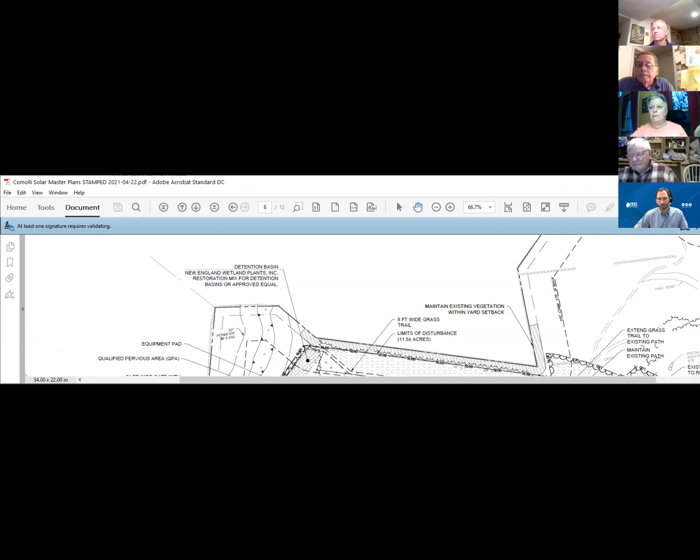Wait, don't touch anything. Just make it bigger so you can see more people. Oh, here's the view—can you share now? I don't want them to see me. Yes, thank you. That's all the people that are in. The host can also mute other participants if you'd like. Okay, there we go, right, you should be able to see the screen now. They can't see me, right? You want me to put you on? No, let me just wait. No, Joe, we can't see you, but we can hear you.

Okay, so I'll zoom in a little. So this is the landscape plan that was submitted. This line, can you see my hand? Okay, so this is the existing tree line, and this is the fence. So all the area that's hatched in here with the plus signs, those are trees that will be cleared, and then the array will go here and that'll be replanted with grass.

And then outside the fence, shade trees will be cut, but not grubbed. The undergrowth remains, and then anything that does happen to get disturbed is replanted with a restoration mix. And then this area all in here, this is already grass.

And so going up the hill, up onto that granite hill to the south, that's going to be cut right on up to at least to the top, right? To get your sunlight in. Right.

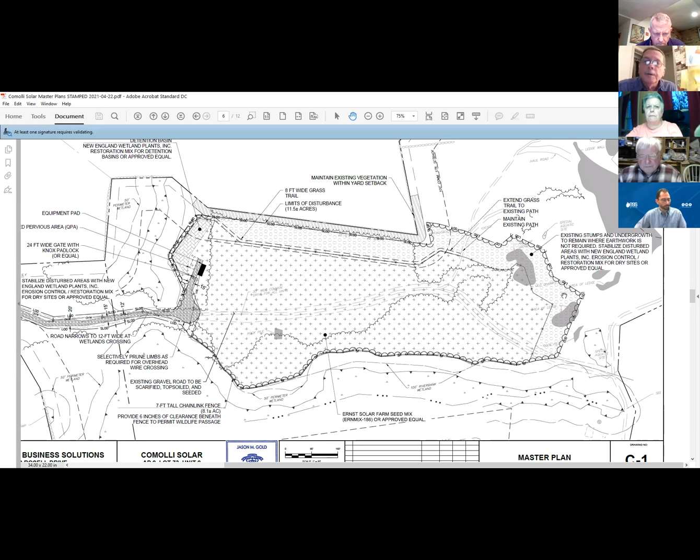Okay, and then up on the north end, where your detention basin is going, and you're right up against the wetlands, you're going to clear right up to the 50-foot perimeter. Is that what you're doing? Yeah, there's a tree line here too. Zoom in on that. And so there is one stretch around here where we're pretty much up against the perimeter wetland.

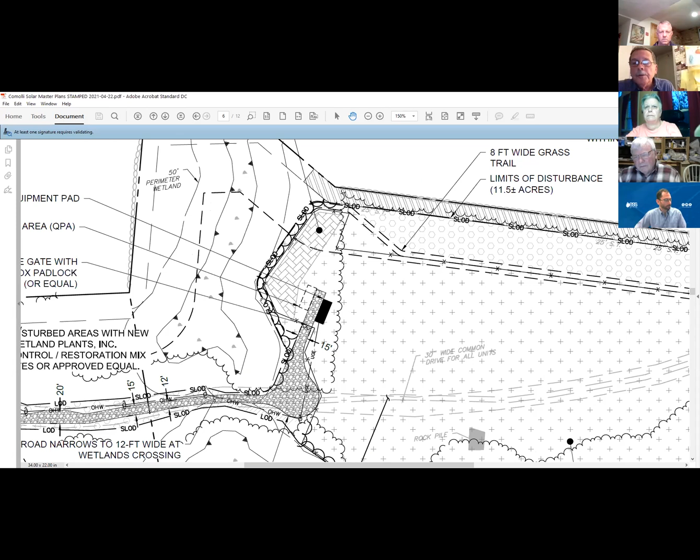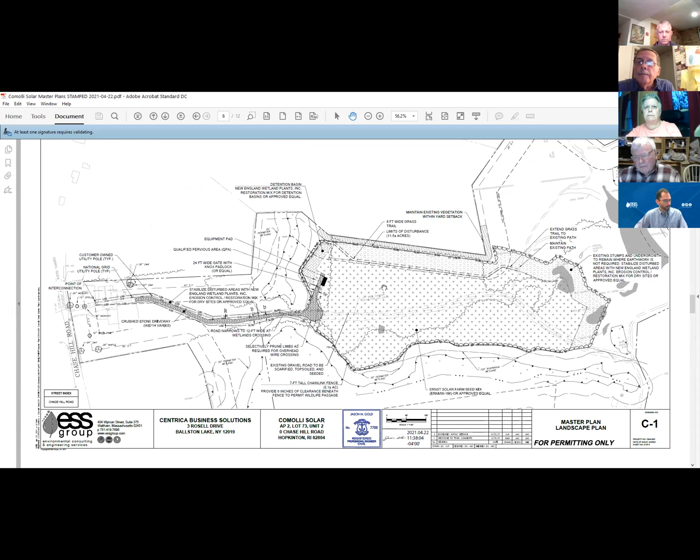And just to understand it, can you show us where the water that goes to that detention basin, how it's going to get over to the wetland? Is there a culvert there? Switch to the drainage plan. So this detention basin here is collecting water from about this part of the site. And then there's going to be, we don't even need a pipe here, there's just going to be a small spillway. And that's just going to flow overland.

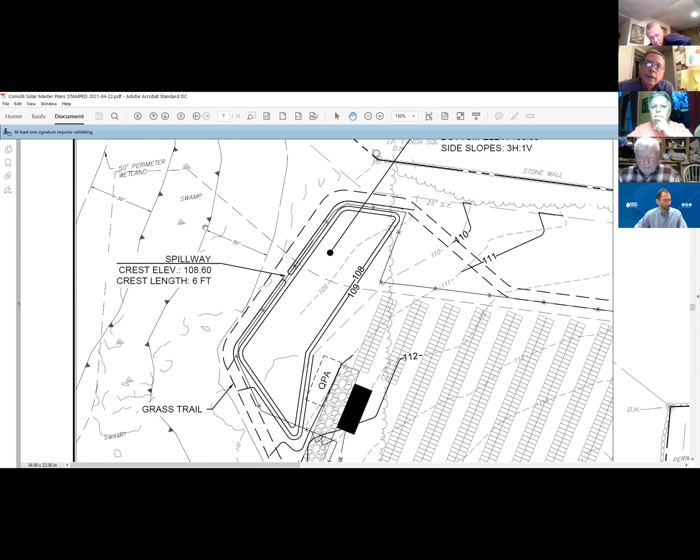Which way is it going to go? It flows this way towards the wetlands. And then is it going to take a right there and go east, or is it gonna go north, or west? It pretty much just goes straight. All right, and then the water from there, which way does it flow now? I don't see the contours. This flows to the east. Oh, to the east. Okay, the wetland flows to the east, yeah.

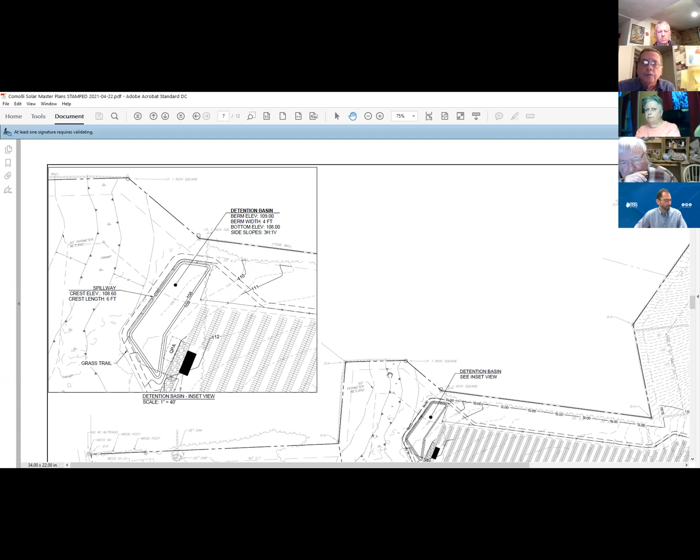Okay, that's what I didn't remember, whether there was actually a culvert somewhere underneath the little road we walked down, and it was going to flow to, I thought it was maybe going to flow to the wetlands to the west. No, they're two separate. Okay. No, this wetland flows separate to the east. Yeah, and then this wetland flows down to the south, and then there's a culvert beneath the road over here.

Then especially down in that south end, what materials are going to be removed? You were saying when we were out there that some of those outcroppings down there now, you're going to have to take down to be able to put the panels up, because I'm sure it's got to do with the steepness or something. That's right. So how much material is going to come off the site down there? Are we talking about 50 truckloads or something? I'm just trying to get some concept of how much that topography is going to change right down there.

Yeah, that's something that hasn't been totally ironed out yet. But yeah, this hill needs to be really flattened out a lot to accommodate the panels. So that'll be this part. I think this part of the hill, if you remember from our site walk, is essentially going to look like the parts north of it that have already been worked. You remember the area before we got to the hill to the north of it where it was flattened out and kind of cleared up. So that's kind of going to have to extend. There were some rock blocks sitting there as well. Yep, yeah, exactly. Right.

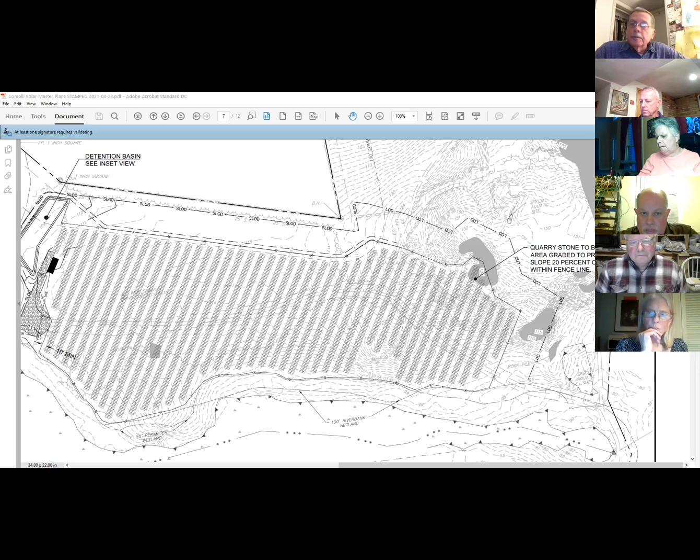Which condition are you referring to? I didn't write down the condition number. Oh, I'm sorry, I didn't think to do that. But it just said that one of the conditions for the native species around the photovoltaic energy system is to be sustained. I didn't really know what that discussion led to in the past with the town council. What's the expectation there? I'm assuming to sustain the native species, you first have to identify what's there so that you can sustain it. Would that make sense?

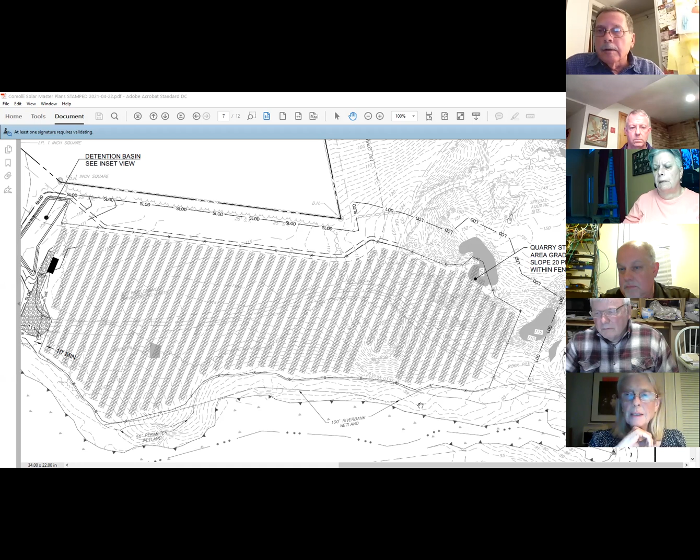I'm not seeing that specific condition quickly, but the area outside the fence, the existing ground cover remains. So the shade trees are cut, but whatever vegetation is there now, that remains. I don't know what they were thinking, what's being preserved - animals or plants, probably both - but it was a requirement, and I didn't understand what was intended. I was trying to get Barbara Capalbo, who was on that town council, but maybe Barbara knows what she intended.

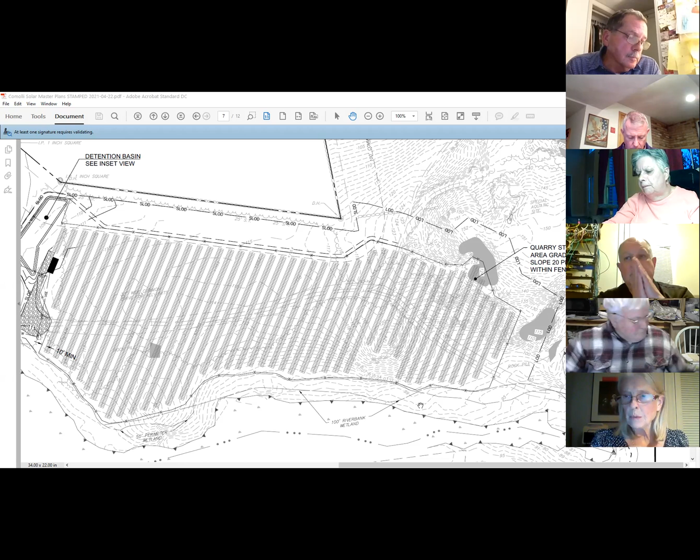I don't remember that particular requirement. I know we talked about using native species, and about protecting native animals, but I don't think it's part of the requirements. I would assume they'd do that anyway, but that would be something DEM and the reforestation or outside ground planting would handle. We talked about doing meadows or native plants, but I don't think that was a requirement. I don't remember that as such. I could be wrong, but I don't remember that. Yeah, I'm not seeing it.

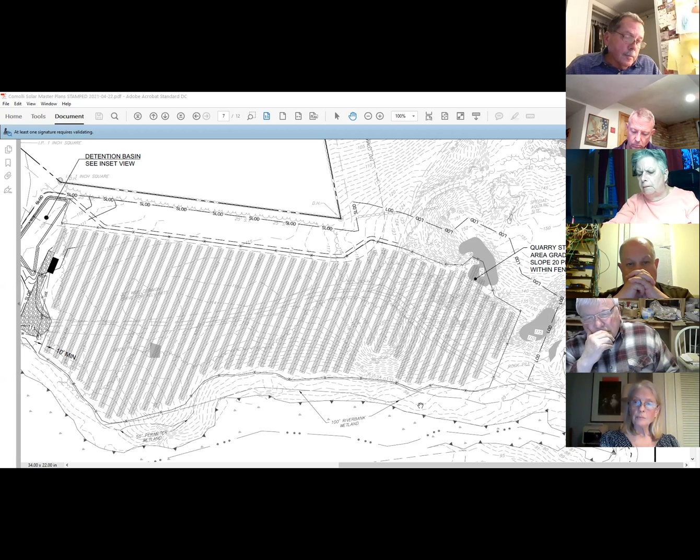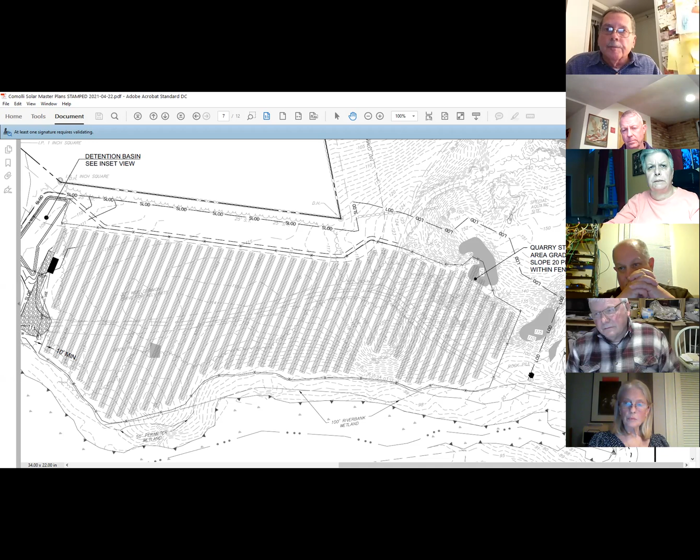Okay, so my last question on that category was trying to understand the ground cover and permeability within the fence area. A lot of the solar sites we've had, we've been after applicants to scarify because of compaction. Maybe this is a different kind of soil here, more gravelly, so maybe that's not as much of a problem. You said you'd probably think the standard is going to be 6 inches of topsoil brought in and put on the site in the panel area. Is that correct, Jason?

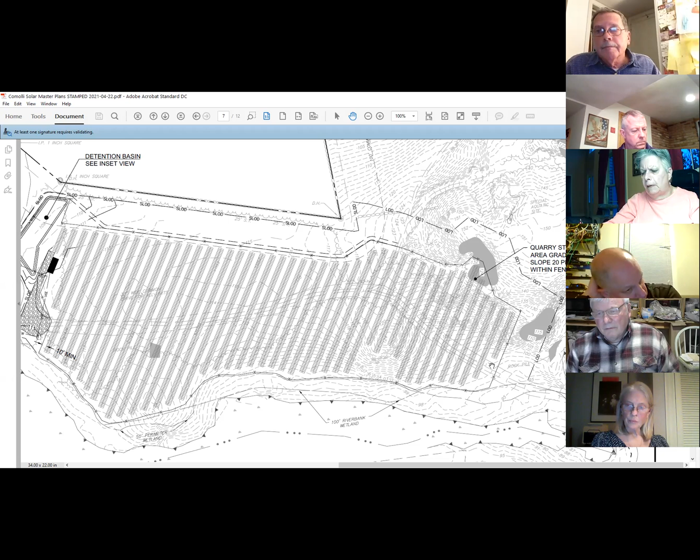Not necessarily that 6 inches needs to be brought in, but there needs to be 6 inches total. So if there's only 3 or 4, they'll need to bring in the rest. The minimum is 4, but lately on these projects, and on the RIDEM comments we recently received, they've been asking for 6 inches on these solar projects. Now you were talking about 6 inches of what we call organic matter - is that what we're talking about? Topsoil, yeah, loam or topsoil.

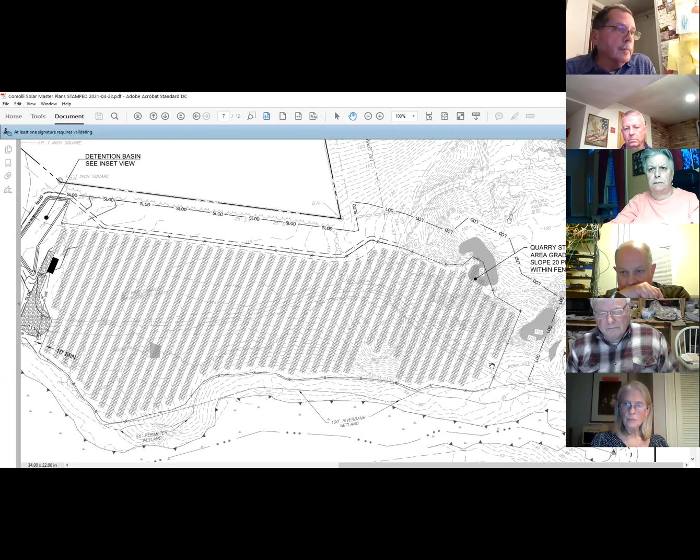So how does that get analyzed? How does somebody go out there and say there's only 3 inches now? Who makes that determination - is that your job? That's on the contractor. I'm sorry, the contractor - is that Centrica we're talking about, or whoever is actually building the project? Right, whoever's building it. Ultimately it's the applicant's responsibility, but the contractor who's building it would be documenting that.

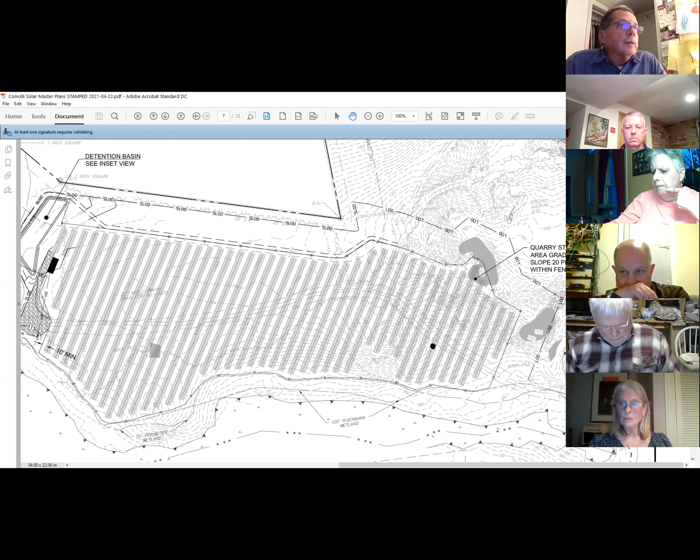So that might be one of our questions for the planning board - how do they determine that they've got 6 inches or 4? I'm not trying to put numbers in your mouth that aren't requirements, but you're indicating it's likely DEM is going to say they want 6 inches. So how would that get determined? Because to me that's a huge factor in how much moisture it can absorb.

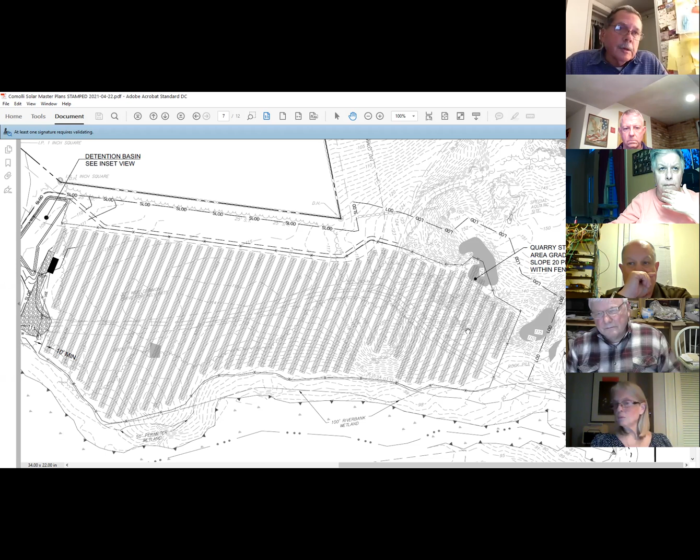If you've got 6 inches of non-compacted topsoil with grass growing on it, I'd think you could absorb - I don't know, it's not my area - but you might get a 1 inch gentle rain and not a bit of it runs off the site. So to me that's important, having sufficient topsoil and having everything nice and light and fluffy so it can absorb that water. So Deb, why don't we try to put that into some kind of note I'll get off to the planning board. Thanks.

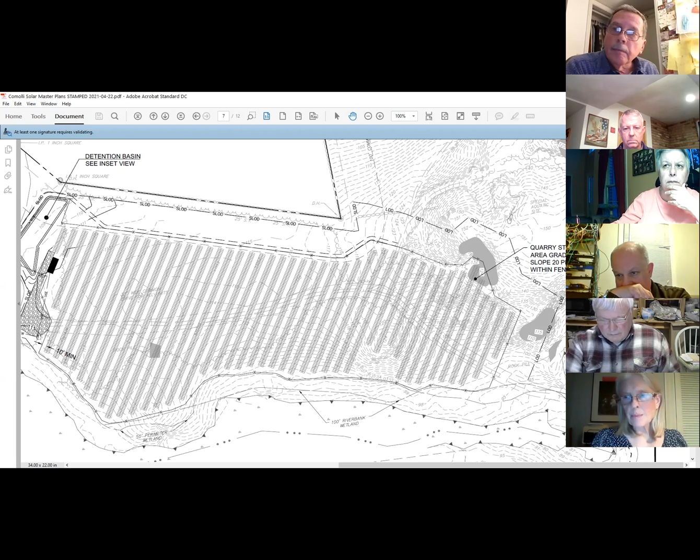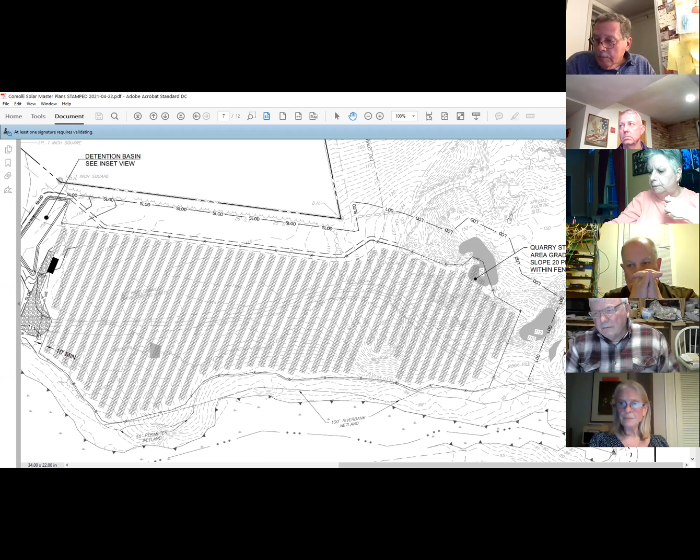I would also think the topsoil would be overplanted with grass or meadow, so that would help with water retention too. Certainly, yes, at least 6 inches for that to take. So I'm assuming that would be something, Jason, that would be part of Centrica's plan? Yes, and the planting is on the master plan set that's already been submitted.

All right, anybody else got any questions on any of the vegetation, trees, grass, or anything? Soil?

Joelle was going to get back to the land trust on that, and this is kind of out of my area in the Conservation Commission, but I just want to know, is that progressing? I have no idea if they're planning on having anything to present to the planning board next Wednesday, or whether this is something they're seeing more long range.

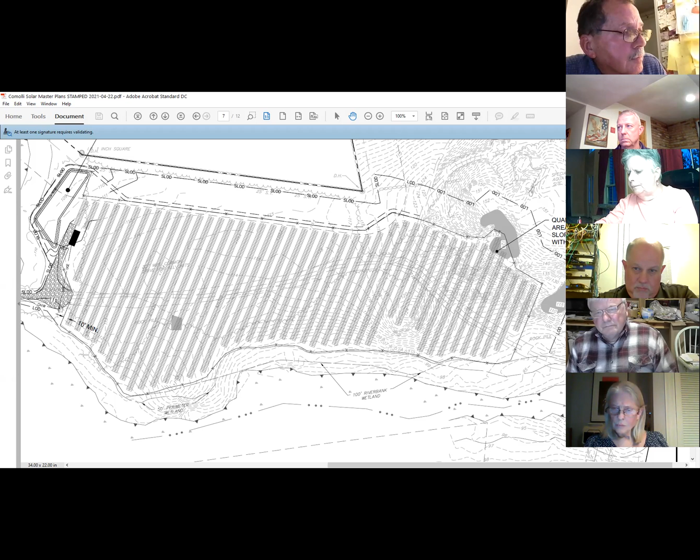Does either of you have any comments on that? I know that Joelle Rocha has been going back and forth with the land trust. I haven't been part of that conversation, but they are actively engaged. Frankly, I didn't hear all of that, but if the answer is that it's being worked on, it's not done yet, that's fine, I just want to know the status. So it's being worked on, yeah. Okay, all right.

Anybody just jump in, I don't want to be the only one talking, but I do have a list, so I'm working down it. Jump in anytime. All right, so roads and trails.

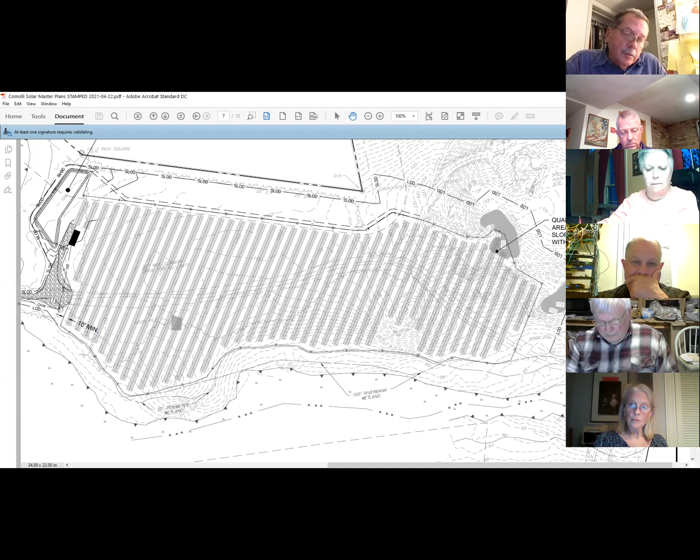My question was, what permitting is needed to widen the road, to come down into that area? It's going to go from what they're saying is 8 feet wide now, to what, 15 feet or 20 feet? I saw on another project where apparently the fire chief or fire marshal was requiring a 20-foot road around the perimeter of the solar field. I guess that's for maneuvering purposes.

What size road is this going to be then again? It's going to vary, so it'll be 15 feet down the hill, and then we're going to narrow to 12 feet between the wetlands to reduce the wetland impact. Okay, so there's not any culvert or anything there that's already filled? Right. Okay.

So the other one, I'm trying to understand it still. When the condo units were created, there was units 1, 2, and 3, and they shared a common interior road system, which is certainly being disrupted with this project. When we had the site walk, at least according to my notes, it seemed to come out that it's understood that unit 3 is not developable. I'm not sure if that's really true or was what was intended, but can either one of you comment on that, or tell me who should comment, as to whether there needs to be any kind of provision for a roadway now or in the future from coming through unit 1 to get all the way back to unit 3?

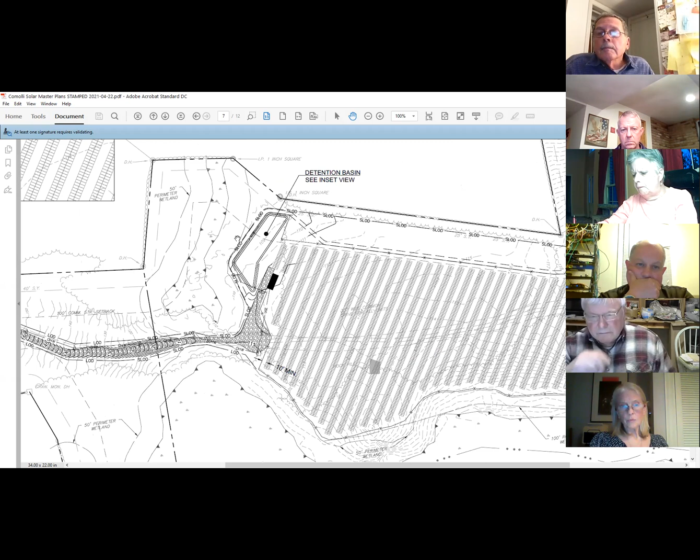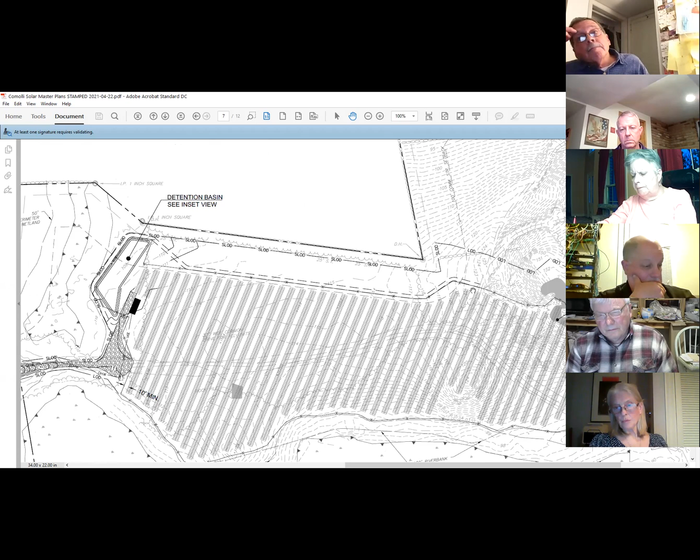Yeah, so I don't think the comment was that it's not developable, just that there's no intention to develop it. The access to unit 3 will be this, you can see the dashed lines here. This is just a grass trail, and that's all that the owner of unit 3 needs to get back there, he just takes an ATV or whatever. So there's the grass trail that routes around the array, I'll zoom out, routes around the array, and then connects back to the existing trails, and you can follow that to get back to unit 3.

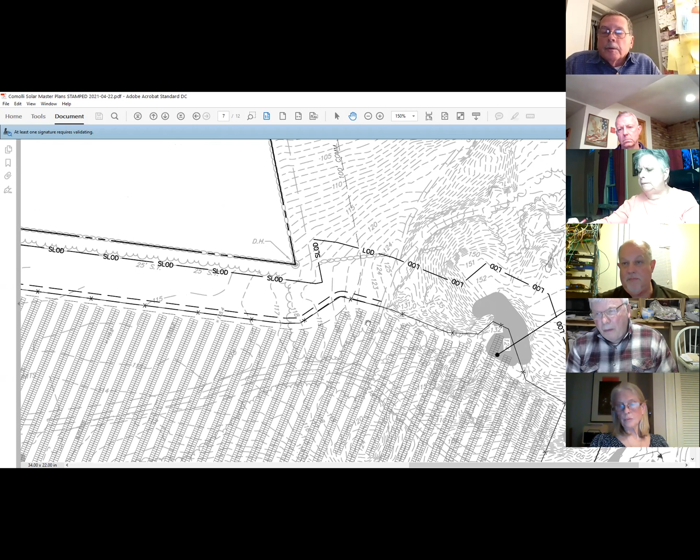So is it a permanent agreement? Is that something that's going to be in writing in deeds, or some kind of understanding between those parties? The reason I'm asking is about the land trust itself, one of their concerns was to be able to come in this way and access the existing land trust properties to the rear. It would be a real help to them, I know. I'm not trying to... I know that stuff is getting negotiated, outside of your control possibly.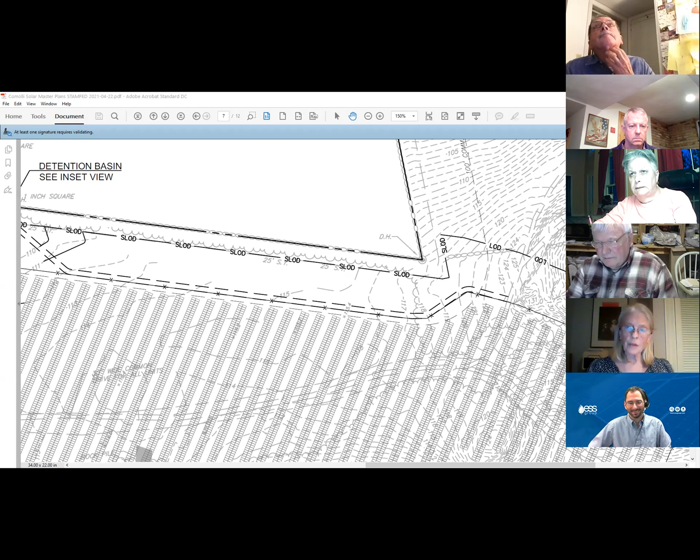It seems reasonable to assume they'll be as efficient as they can, because that benefits the contractor and benefits Centrica. So I'm assuming it's going to be as efficient as you can provide in conjunction with National Grid, and they'll have something to do with it. Not as concerned about that.

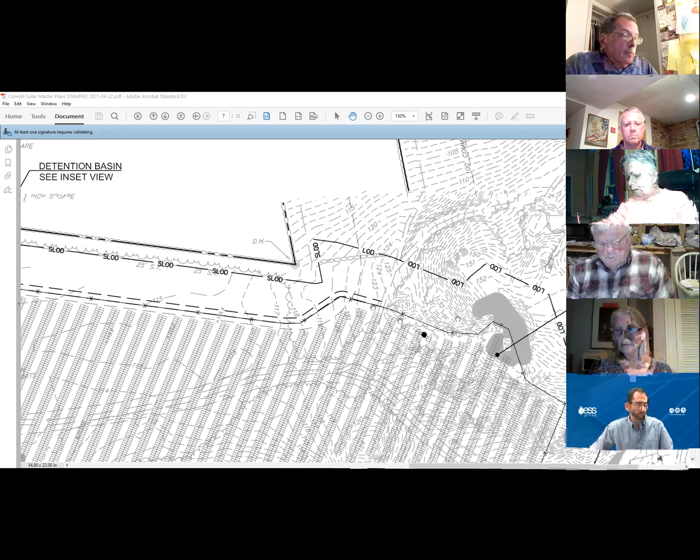The tracking panels, I think, are interesting, however they're also more maintenance unfriendly, so I think they'll probably do a balance on that. But it does seem to me, Jason, that your company is trying to be as efficient as possible as far as the solar energy extracted.

Well, certainly, nobody's going to leave anything on the table unless there's a reason for it. It comes down to an economic balance—the more power a panel can produce, the more expensive that panel is, right? So it's also how much National Grid will accept, in that as well, yeah.

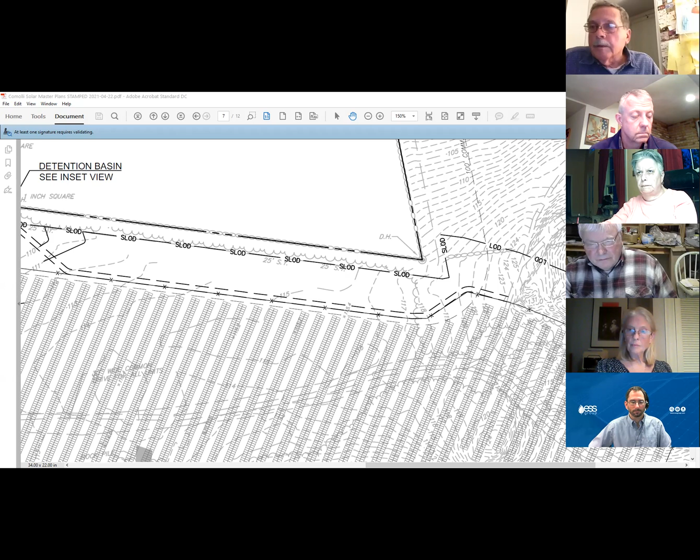By asking questions of various solar applicants, I've been able to create a better understanding of what the industry is and how it works. That's part of why I asked about tracking panels. Something like 90% of panels installed in the United States for the last few years - well over 80% since 2019 at least - are all tracking panels, and they're 30% more efficient than the same panel not tracking. From what I got from the federal lab that oversees the research on it, cost-wise they're equivalent to putting in more panels by using less of a footprint. And this is just nationally, not in the Northeast where everything's more expensive and difficult to build with. The tracking panels are the standard.

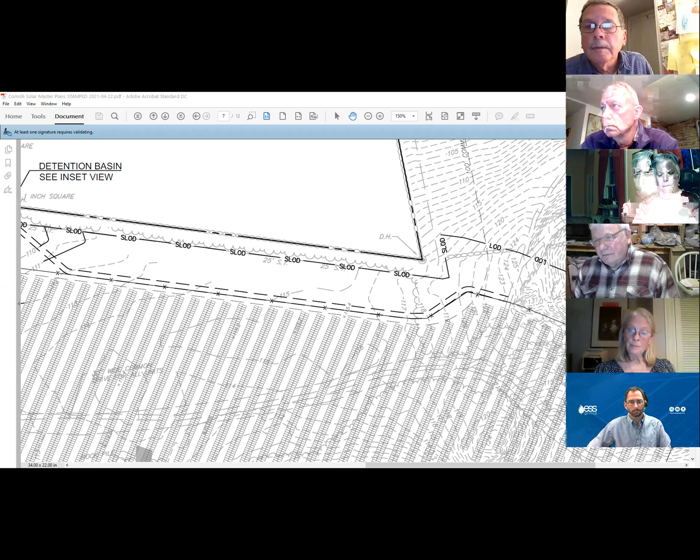Hi, Colleen DiBenedetto from Centrica. Tracking panels at this point are not... Colleen, we can't hear you, can you turn your volume up? How do I turn the volume - I don't see a button for that. If you just put your face close to the microphone, maybe that will help. Can you hear me better now? Yes, okay.

Tracking panels are not at this point in Centrica's business model. We have been installing fixed panels on all our projects. I think we haven't really looked at a cost comparison for that, but can say that the operational expense is very different than fixed panels, and that's why we chose this technology for our projects.

So if I can summarize, if I'm understanding you right, you're saying to get the same amount of electricity it's going to cost more money? Generally speaking, yes. It's the operational and maintenance costs that are much higher for tracking systems.

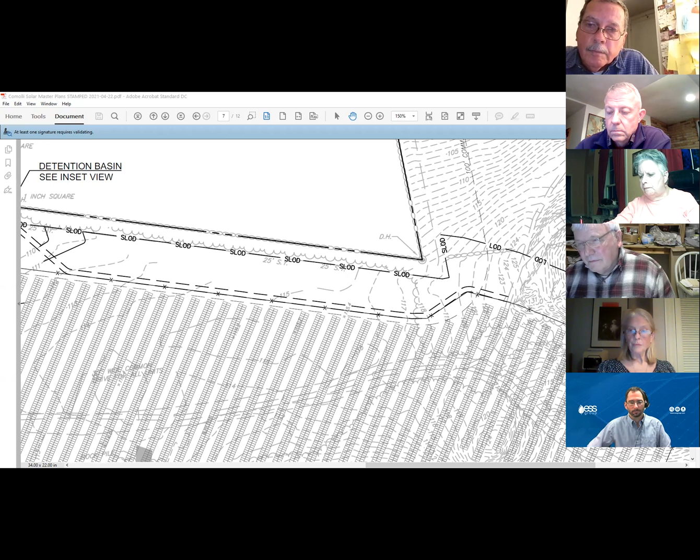So is it just something different here in this part of the country, or does the method used in most of the country just not work here? I work primarily in the Northeast, so I can't comment on the rest of the country. I have seen a small tracking system out at the Laurel Lane Golf Course in Kingston - I think it's less than 500 kW. That's over in South Kingstown? Yeah, it's in Usquepaug. Okay, I'm going to have to go by there and take a look at that.

I keep feeling for this, because getting the highest efficiency is a great way to reduce the footprint or make more electricity, so that's why we're asking. Anybody else got a question on that? No, I was going to make a comment - the engineers putting a solar array on my farm, I asked them about that, and they answered me in one word: maintenance. Okay, basically. Well, I'm sure they have some reason.

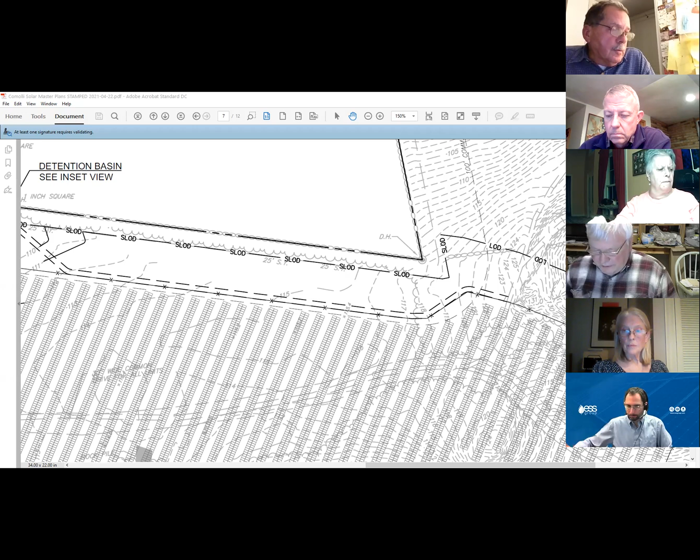The next item on my list was the fence. We talked about getting away from chain link fence and going with something that disappears a whole lot more. I sent information on the kind of farm fence used on other solar projects, and I'd like some feedback. Are you looking into that? This is pretty important to the Conservation Commission - frankly, when I go past other solar projects you can see from the highway, which this isn't one of, it looks terrible. It would be great if you came up with one of these other systems, like a farm-type fence with a black coating that you barely see, as a solution.

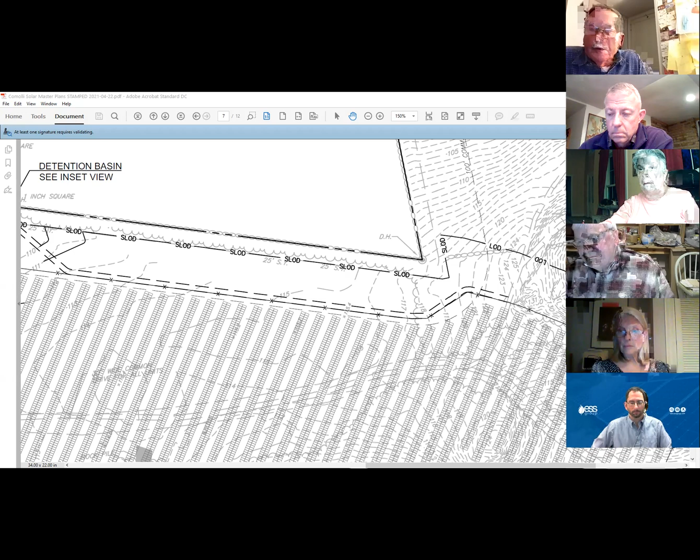So since our conversation, what have you done about that? You make a good point - you can't see this from the street anyway, but we did run that fence by the fire marshal, and he says it's not up to code. What's required, as we mentioned in the field, is a non-climbable fence, and that sample fence you sent is not considered non-climbable.

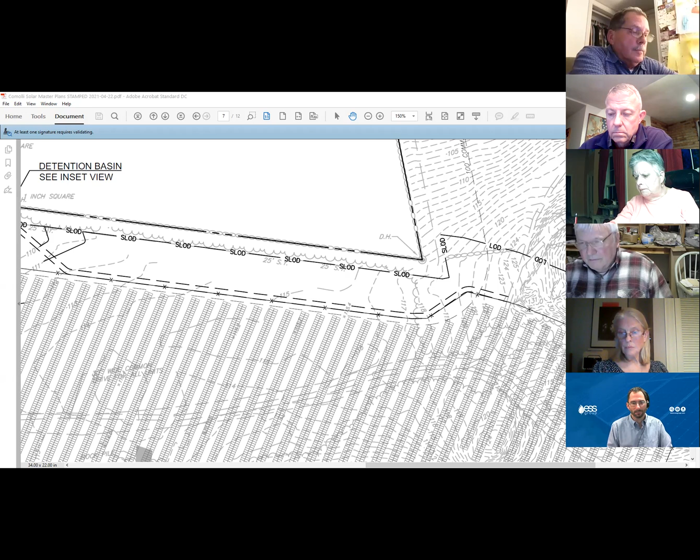Who is the fire marshal? That's Ronnie Sposato. Okay, and is he quoting from the code, or does he just have discretion to make that decision on his own? The fire chief, I'm sorry - there's a code, and there's the fire district's interpretation of it. All right, so it's the fire district's interpretation. Okay, I just wanted to understand. Can you tell me what you have - are we talking about... I can cite it for you if you'd like.

It's Rhode Island Fire Code 11.12.3.3, security barriers. The Ashaway Volunteer Fire Association states that fence must have a design which has been determined to be non-climbable.

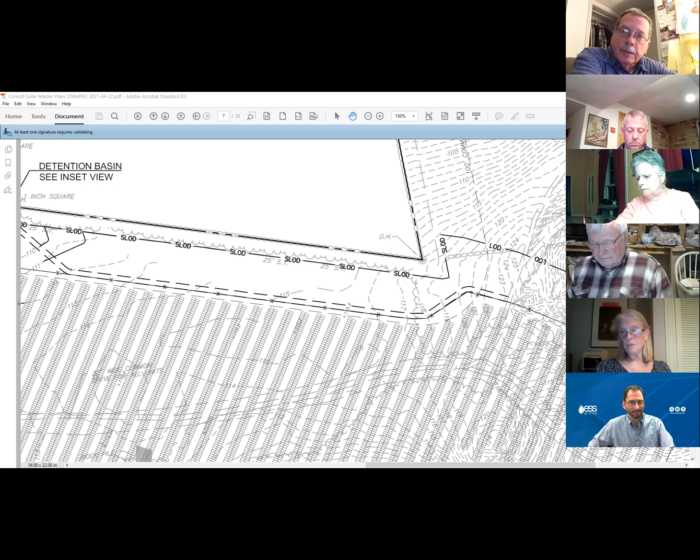Is that a letter from them? It's a memo. Is that something in the packet going to the planning board? No, we just received this yesterday or today. Is that something that could be put in there? I mean, I'm not going to butt my head into a brick wall on it.

I'm just trying to nail that down, because it really makes a difference in appearance. They've got their job to do, and if that's what they think it has to be, then we either deal with that or find a workaround with them. And it's not on you anymore. That's right, and ultimately for the building permit, the fire marshal has to sign off on it. They're going to be more concerned about safety than the appearance of the fence, of course. I understand everybody's got their own approach to it, and that's what their job is.

So is this memo something that you can share? I can't imagine why you couldn't. I think Colleen was working on getting something in writing from Mr. Sposato. I don't know if we have anything yet. Colleen, is there anything coming today that I haven't seen yet? No, nothing's come in yet. Our project manager had a conversation with Fire Chief Ronnie Sposato at the Ashaway Fire Department.

He provided our project manager with the documentation that Jason cited, and said in his opinion, this is secondhand, that he considers the farm fence, the material, the cut sheet and the link that you sent us, Harvey, he considers it to be climbable. I'm sorry, I didn't hear that last part. He considers it to be climbable. Okay, okay, all right.

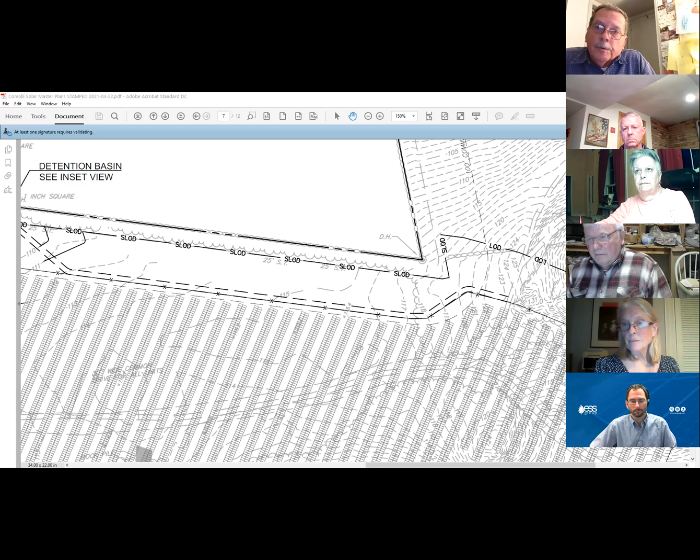So anyway, I would say that if we don't have that, let's put something in ours, Deb, to the letter that I'll put out to the planning board to ask them to please require that and require a review of that. I'm not trying to butt heads with other officials trying to do their job, but I've said all along, we want to see why we can't have something that looks a whole lot better. And so I want to be sure that the planning board...

We're looking for options, Harvey, we're looking for fencing options. Well, anyway, if you could put something together, some scratch notes, and share them with me, then I'll be able to make a copy of what you proposed, of the fencing you proposed. We can put our information in there before the board, and then come back to the fire code 11.12.3.3 security barriers, and that there is supposedly a memo from the fire chief interpreting that to mean it can't be climbable, and that something with 6-inch stays is considered climbable even with barbed wire on top.

So that's where we want to get it to. The fence that you showed was actually very good looking, but there might be interesting fences like that which are not climbable without barbed wire on top, because I think then you're injuring animals that are jumping it. So I would prefer certainly not to see barbed wire. And I think the fence is very nice, and perhaps if it's not, then chain link, but it wouldn't be climbable. I think Ron has a good point, but there might be a fence that is a better look that would still solve both of your problems.

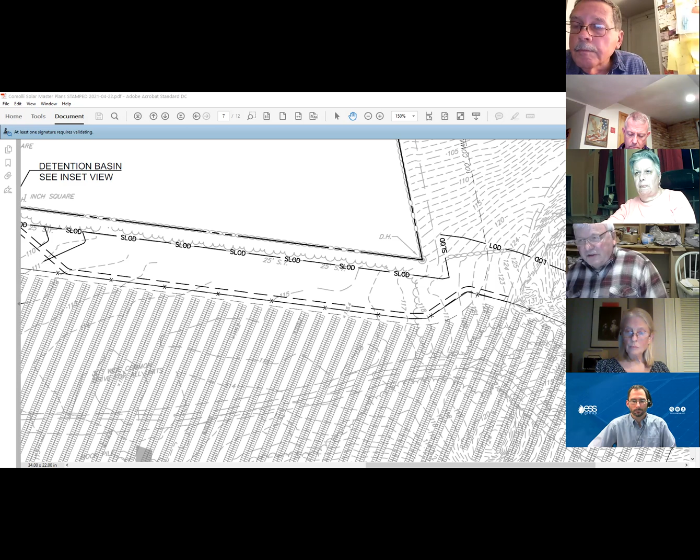You might be able to get a 3-inch stay, the vertical wires 3 inches apart, and it would be capable of not being climbable. That's about the size of the opening in a chain link fence, the little diamonds. So I'd think that's better if it's 3-inch. My concern is that 6-inch space, does that go all the way down to the ground? No, the fence does not go to the ground. The fence is required by the ordinance to start 6 inches off the ground. So if it's still 6-inch, because the animals get their heads stuck in it, if it's 6-inch square, an animal will get its head stuck in that fence.

Right, that's also true. I've had that happen down at the farm, Harvey. But the smaller, the 2-inch, or 3, we get that would be better. It would solve both problems.

Gary's right. Well, anyway, if we can eventually get copies of all that stuff, I think if we got all the material to work with, we know what the fire chief says, we know what the electrical code says, we know what the fire code says, then we might be able to better look for these alternatives.

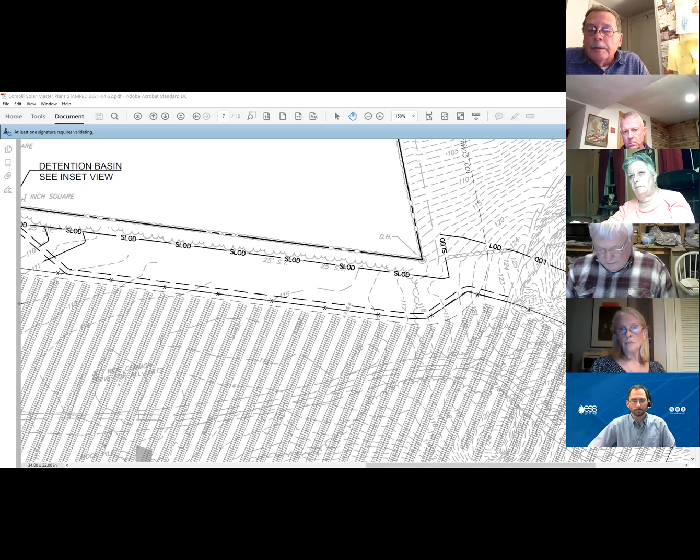It makes a huge difference on where it is visible, and this area is going to have public use right up around it early on, because the land trust is going to have management of that land around it.

So that's all, I'm just trying to move things in the right direction. I'm also looking at this on other projects, so I'm trying to move it along. I appreciate you getting down into the details there, and thank you, Barbara and Gary, for your comments as well.

We're getting close, I think, on decommissioning. The only question I could come up with, I'd love to hear some others, is there any part of the solar project components that you will not remove upon decommissioning?

No. That was a no? That's a no, yes. Okay, that's all you need to say. Anybody else have any questions on decommissioning? I would assume that National Grid's telephone poles stay.

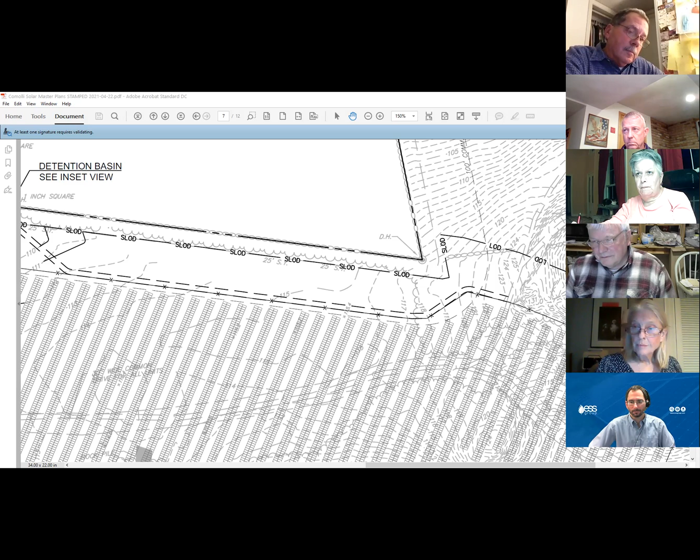That's a good question. Does anybody know the answer to that? Currently, in our decommissioning estimates, we do not include removal of the utility poles. The equipment on the poles we include, however the utility poles we have not included in our estimates.

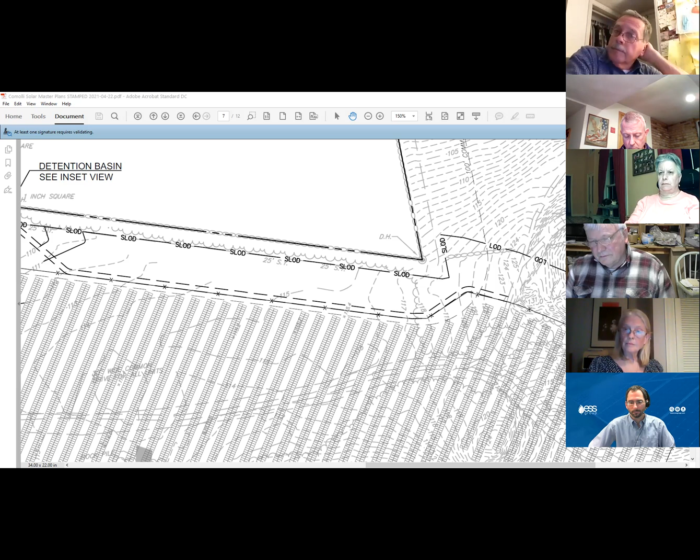Now, most of those poles are on unit 1, right? Yes, all of the poles are on unit 1. I thought there was going to be a couple of them on unit 2. No, you're right, I'm sorry, I misspoke. All of National Grid's poles are on unit 1, but there are a couple of the solar-owned poles on unit 2.

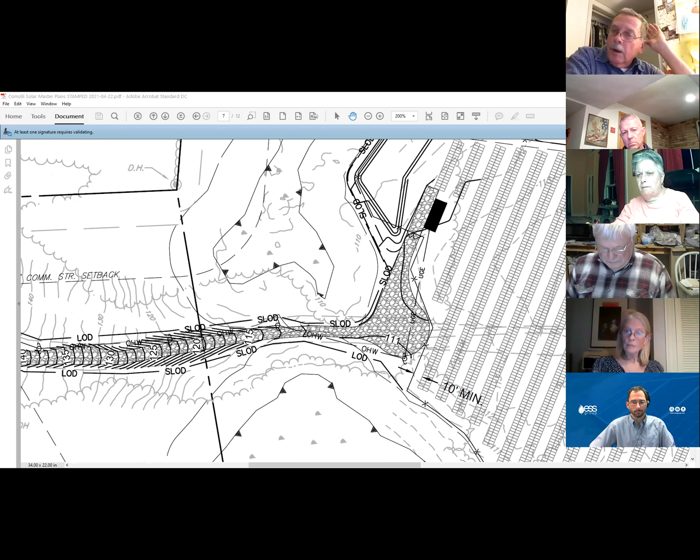So the wires will be removed off those and the poles will still be there? I mean, the wire's pretty valuable. That's got to be pretty heavy duty wire, I would think. Right, I would think so.

I think Colleen's stuck on mute.

Would it be a big deal for those to get removed, the wire and the poles that are on unit 2, before it goes to the land trust? We can include that in our decommissioning estimate, yes. Okay, thank you.

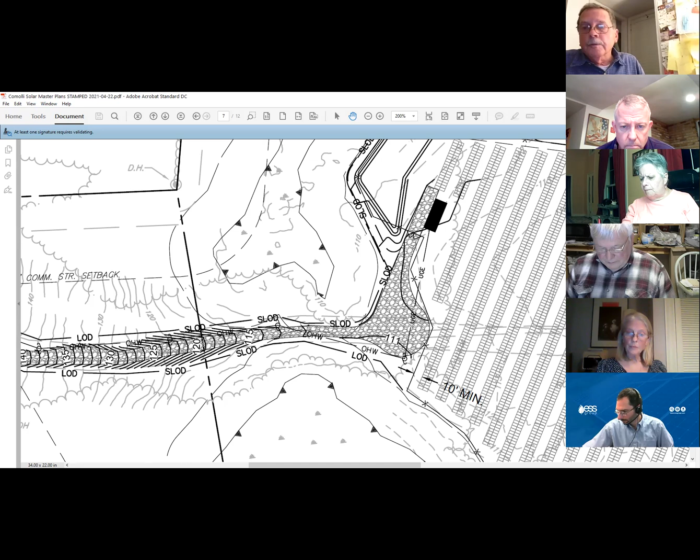Okay, and the last one I had was reforestation. I know we had some discussions with Joel as well, that the land trust in the field, right, what is the field right now, at least? They're very interested in having something like a wildflower meadow, not a forest. It hasn't been forested in probably 75 years or something, maybe a lot longer than that, and they're not trying to bring that back into a forest.

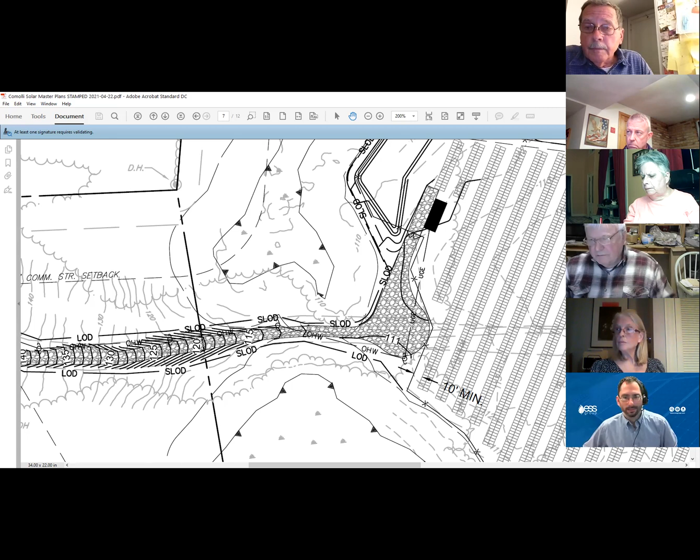Is there a forester that's going to be involved in this project? That's kind of a preliminary plan, too early to get into that level of detail. I think Joel's been talking to the land trust about that to some point, but I have not been involved in that conversation. So where I was trying to understand was if there is a forester already going to be working on this project in some manner, because the planning board's going to want to see some amount of detail about reforestation.

Possibly there could be conversation between the forester and the land trust, for the forester, basically as a professional, to give them some advice as to whether any of this area really makes sense coming under their ownership, for them to have forest planted or to have the grassy open space that I think they would prefer in the majority of that area. So they might need a little bit of guidance, but they're going to be the eventual owners, so it's important that it fits well with their mission to manage that space.

So the answer right now is that you don't know if there'll be a forester brought in for the project at all. At this point, I don't know either way.

All right, so yeah, we just might want to raise that as an issue, that if there is a requirement for a forester to somehow be involved, get the land trust heavily involved, because they're going to be the eventual owner and manager of it, and it needs to end up not putting in a bunch of trees that they're going to have to take right back out or something. I'm sure, yeah, it makes sense.

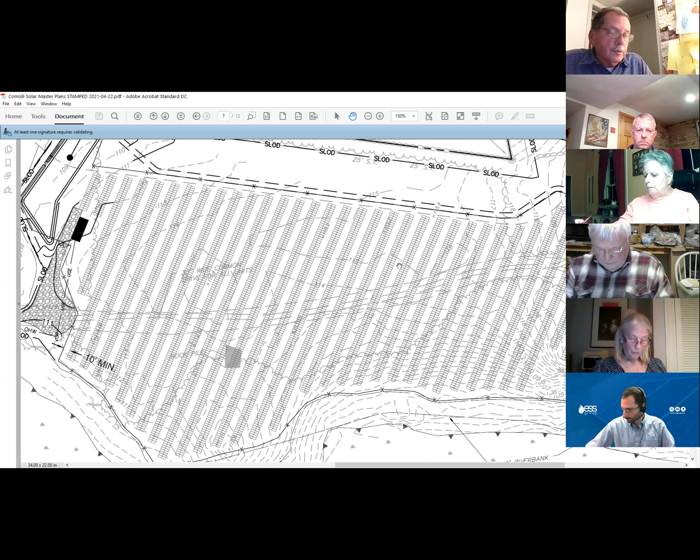All right. Jason and Colleen, do you have any questions for us? I'm taking that as a no. Colleen: I have no questions, Harvey, but thank you very much for allowing us to participate tonight.

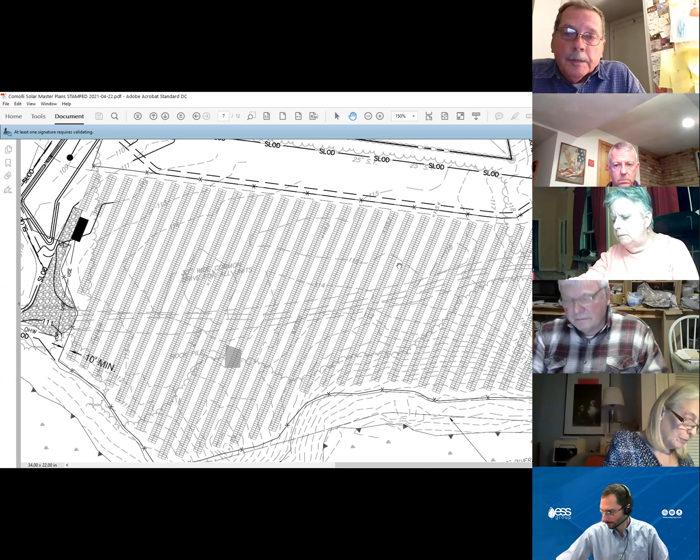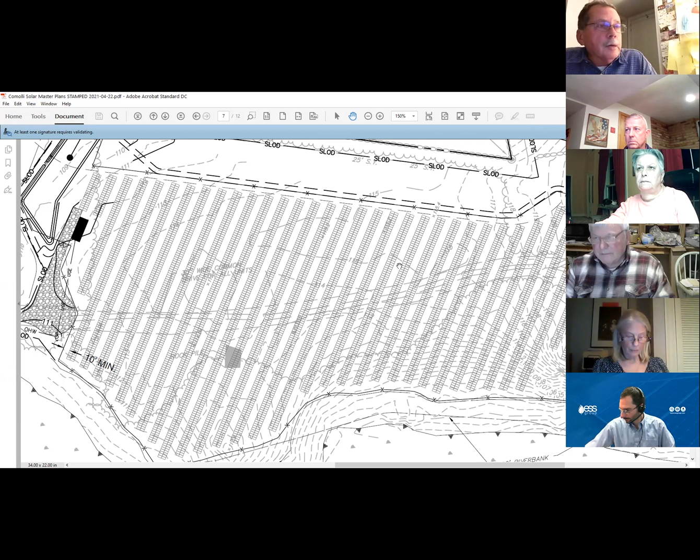You're most welcome. So what we're going to try to do, what we have to do as a Conservation Commission - the planning board has their strict schedules, they have all kinds of legal requirements to get the projects reviewed in a certain time period and so forth. So the Conservation Commission just has to be the one that jumps through the hoops. And we will not have our next meeting until I think 8 days after the planning board meeting.

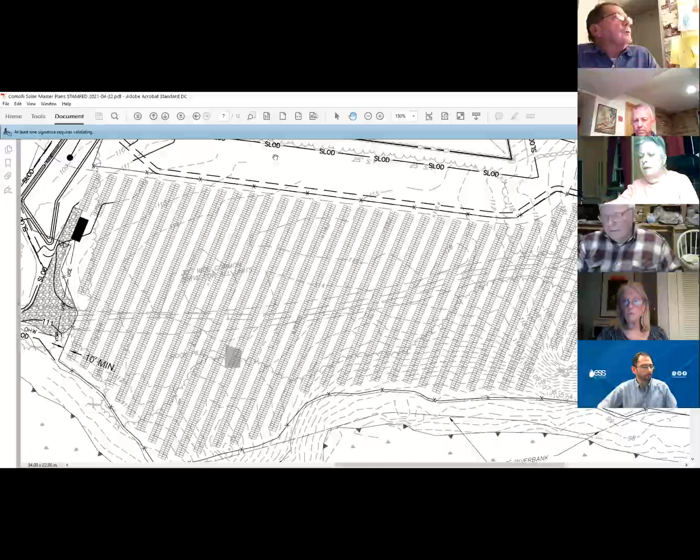So what I'm going to try to do is get our thoughts, questions and recommendations. It's not that much more from what we already had from the site walk. We already had most of our issues in mind when we had the site walk. So, but I'll talk with Deb, try to get her notes and stuff so we can get it kind of together.

And I'm going to put it out. And the intent is to reflect the thoughts of the Conservation Commission, and we'll try to have that in to the planning board in advance of their meeting. This is Thursday, it'll be - and they're meeting Wednesday. Typically I noticed that the packets are ready, so I don't know.

Yeah, if you can get - that's what we always run into. The packets, they got to go out, they need their time, and then we're going to be coming in after that. And Al's going to be yelling at me again for not getting in, but we're moving it as fast as we can. We want to have our thoughts before the planning board, we don't want to sit it out and not have our thoughts involved. So I will try this weekend to get that put together and out to the planning board. Hopefully I'll have it sitting there Monday morning when Jim comes into his office.

Okay, so all right. I think we don't have any other questions. Anybody got anything to say? Please speak up right now. I'm happy to hear from you.